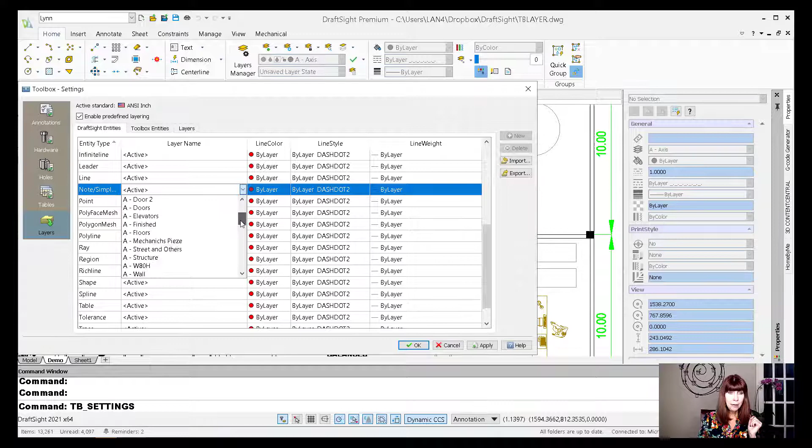Hatching. We're going to put this on a layer called B hatch. Scroll down here just a little bit. B hatch. All right, perfect. And then for my notes, now inside of DraftSight, they're called notes. Inside of AutoCAD, they're called text. Conveniently, I have a layer called notes. That guy is ready to go. And last but not least, viewports. I have a special layer, I bet you do too, just for my viewports that does not print. All right, I am set and ready to go.

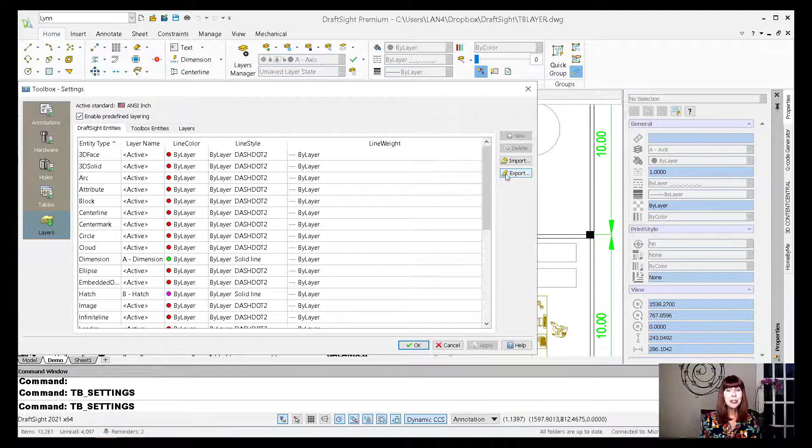Actually, before we go out of there, I want to show you one other thing. I want you to see that you have the ability to export your settings after you get them all set up. You can export it out and share it with other people. If you're a CAD manager, you can share it with your team so everybody's on the same page all the time. Oh yeah, you're gonna like that. And of course, there's an import option as well. All right, we're set. We're ready to go.

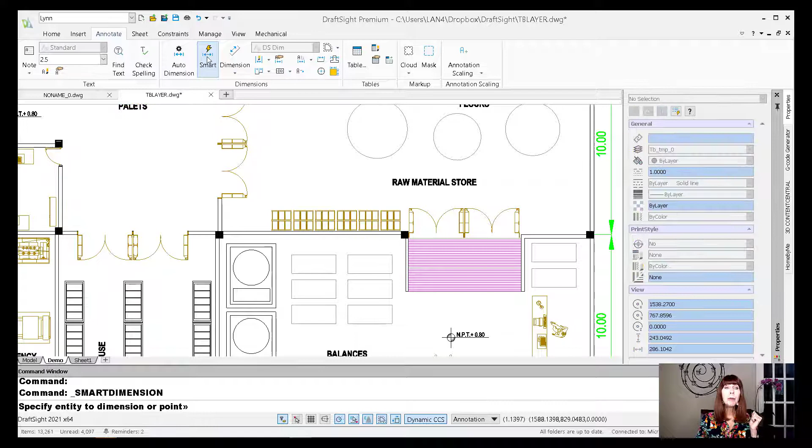Let's try it. Let's see if I'm lying to you. All right, here it says my current layer right now is a layer called A-axis, and it is red. All right, let's see if this works. I'm going to go over to annotate. Let's do some dimensioning. I'm going to use this cool tool called Smart Dimensioning, and I'm going to go ahead and just select this object to dimension.

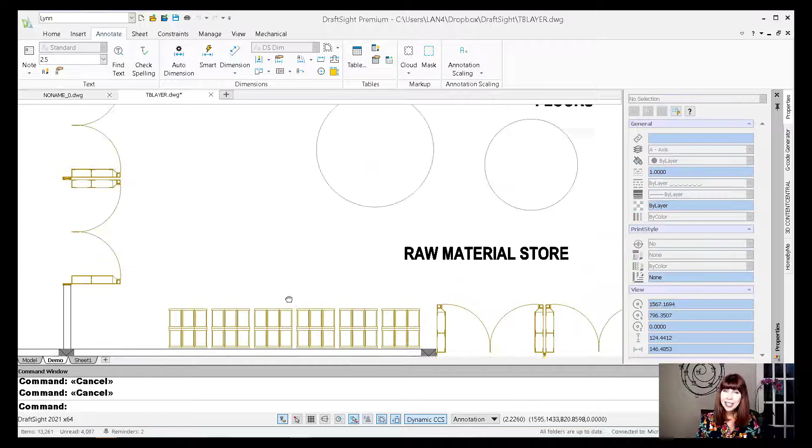All right, well, it's not red. Let's zoom in. It's definitely green. Let me select it, and you will see that it is on a layer called A-dimension, and it's green. All right, so far so good. Whew, one down. Save me some time. I don't feel bored yet. I love this tool. All right, let's try some hatching.

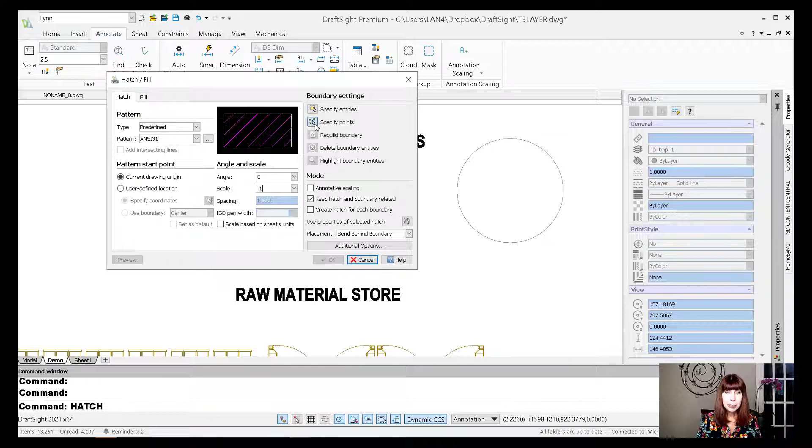Let's go into the hatch command. I'm so used to typing, I'm going to type it in. All right, I want a scale factor of 0.1 actually. Tiny, 0.1. And I'm going to go ahead and select an internal point. Let's put one in here. Now I want you to look over in properties. Look at this. This tells me the layer right now is this temporary layer because it is using my TBLayer command. So it's overriding the current layer.

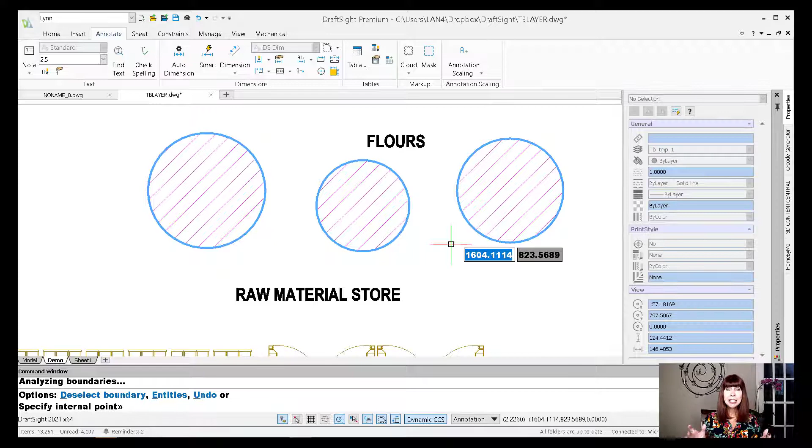I'm going to pick in here and pick in here and pick in here. And we are ready to go. You can see it's definitely not the same color as the current layer. All right, we're all set. And there is our hatching. All right, 2 for 2. So what else do we got?

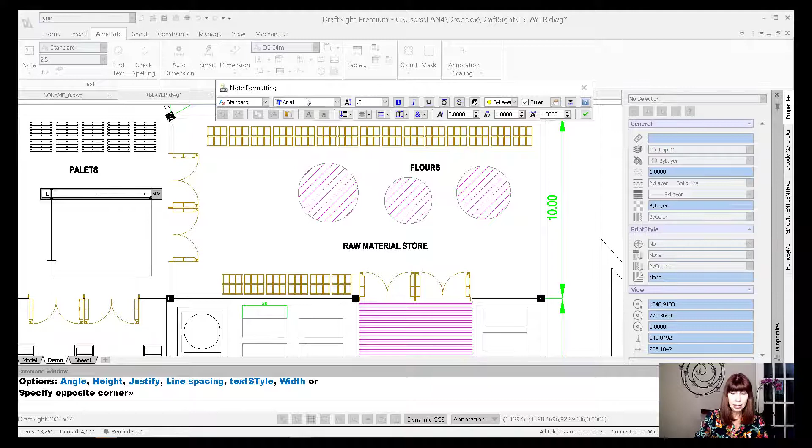Text, right? Okay, so let's draw some text. I'm gonna draw some MText. I don't know what the command is inside of DraftSight. I don't have to, because remember, DraftSight speaks AutoCAD. I want it to go right in here. And that looks like it's pretty tall. Let's make that a lot smaller. How about 0.5? That's much better.

TBLayer. Yeah, we love it. Oh, it's hard to see that. It's yellow. Must be on the correct layer, though. I love that. All right, there it is. Hard to see. It's on the right layer. If I click on it over there, you can see it's on the notes layer. Yay. And then last but not least, let's go over to an empty sheet.

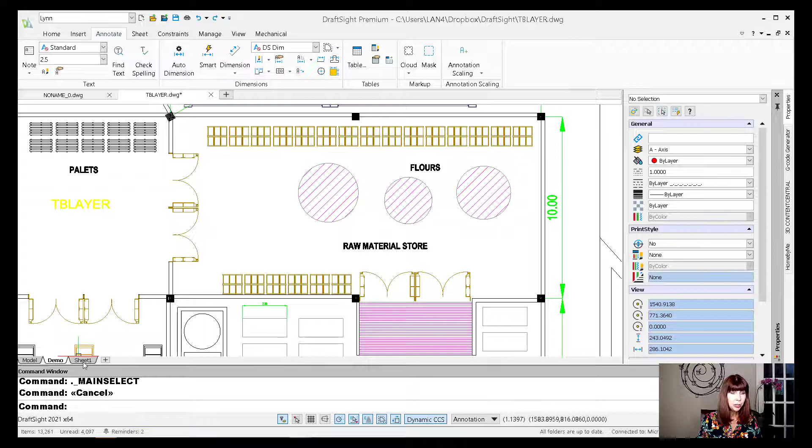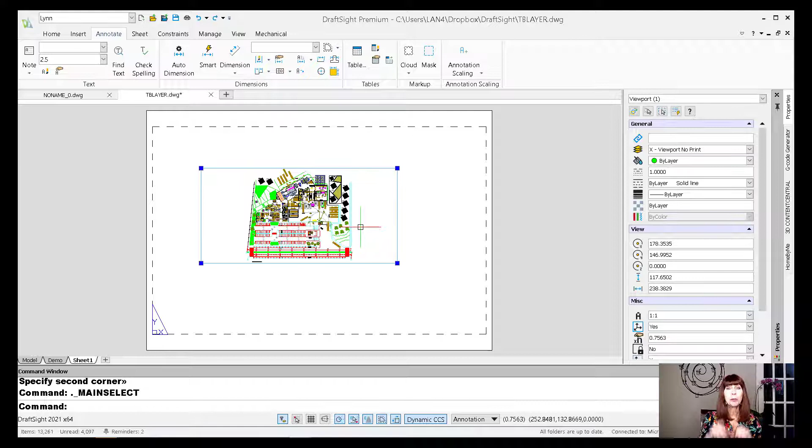Come over here. Should we do a viewport? Let's do MView. All right. And last but not least, that viewport went on the viewport no print layer. Let's click on it. Look at that, the viewport no print layer. Yay, I'm 4 for 4. So each time it temporarily switched over to that layer to put the object on it, then it went right back. If I come back over here, you'll see that my current layer is still A-axis. That never changed. Oh, I love it.

What are you gonna do with all that time? Oh, it's going to be wonderful. You won't be as bored. You're going to be so much happier. So you'll just be happier with DraftSight. There's a lot to be said for happiness, right?